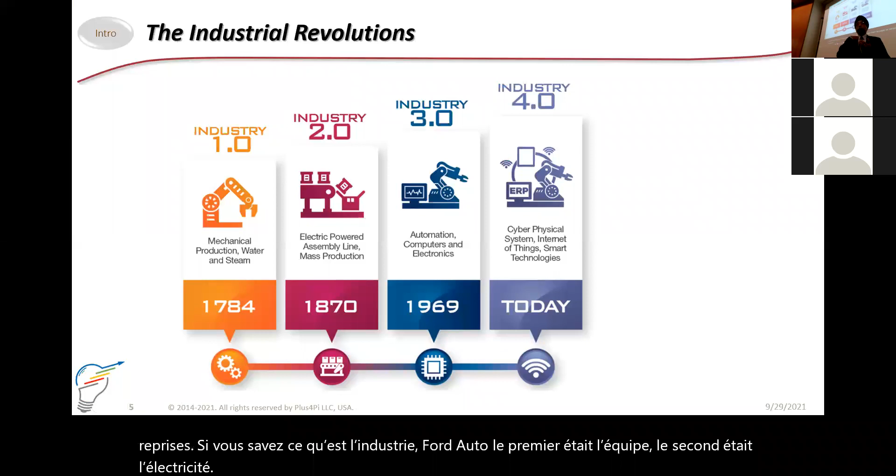I think you have seen either this type of chart or something similar many times if you know what is Industry 4.0. First one was steam, second one was electricity, third is computers, and the fourth is combination of physical reality and numerical and cyber systems. It's digital, physical together. In the second revolution, we became masters of the physical world. We learned how to deal with material. We learned how to process metal, non-metal, plastics, and everything to make products. In the third revolution, we became masters of the digital world, the data, the computers, processing, visualization, communication. Everything went from what used to be physical into the digital form.

Now, we are at a point where we want to become masters of digital and physical world. Yesterday, I gave an example of a driverless car. A driverless car is the most beautiful, simplest example to understand Industry 4.0. The computers in the car, the digital world in the car, fully understands the physical reality outside the car. It knows the traffic, it knows the road signs, it knows what is moving. The computer on the car can process that information in real time, very fast, and take physical action of driving the car, accelerating, slowing down, taking turns, avoiding accidents. The entire system is what differentiates Industry 4 from 3.

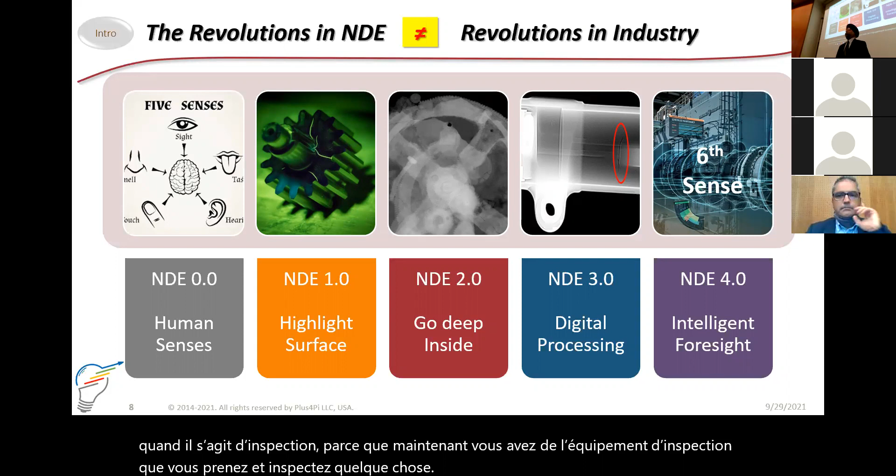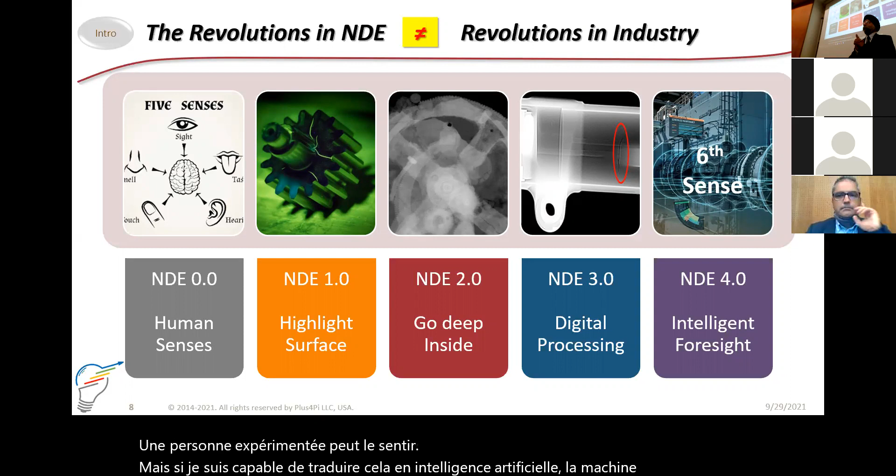That would be revolutionary when it comes to inspection, because now you have inspection equipment that you take and inspect something—it's not cracked yet, but it will crack in the next year or so. An experienced person can feel it, but if I'm able to translate that into artificial intelligence, the machine can also predict that. That would be NDE 4.0.

So that was my outline of what the fourth revolution in inspection is. We are now going in the inspection world from being able to see behind the surface, being able to handle it digitally, and now even able to see ahead in time—that it will crack in the next 6 months, and where will it crack. So we are adding a new dimension to our understanding, and that's why we call it a revolution.

Why do we want to do this? Let's talk about why.

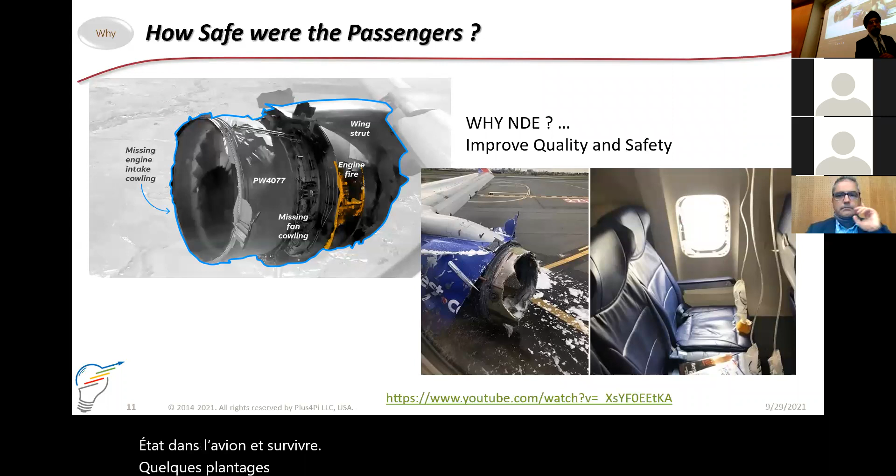Some more recent crashes happened—we talked about it briefly when we were waiting for the computer to come up. So we do inspections because they are critical to safety. That is why we do it.

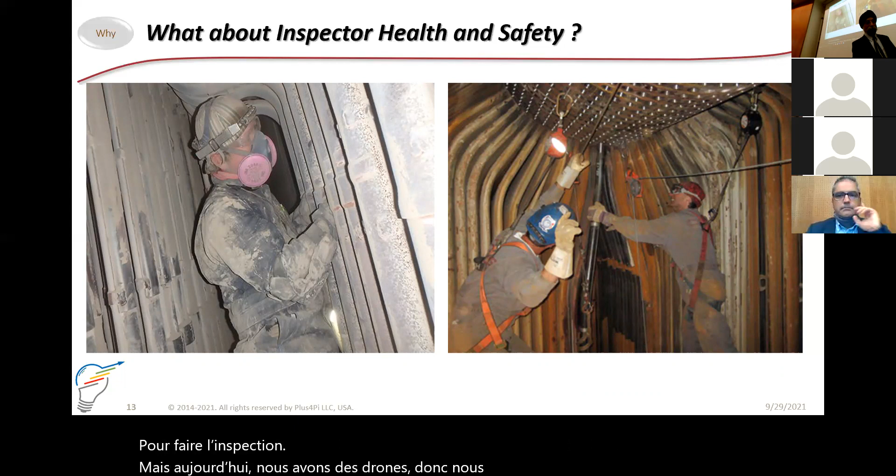There's another reason we want to have inspections done automatically. Here is a coal boiler where the inspector has to go into a very hazardous environment to do the inspection. But today we have drones. So we can actually save the inspector from having to go in by sending a drone that does the inspection. Okay? So there is value in automating the inspection system.

It assures safety for the passengers who are in the airplane. It assures safety for the users, travelers in the train, for the users living in the neighborhood of a nuclear plant. But it also helps us with safety of the inspectors.

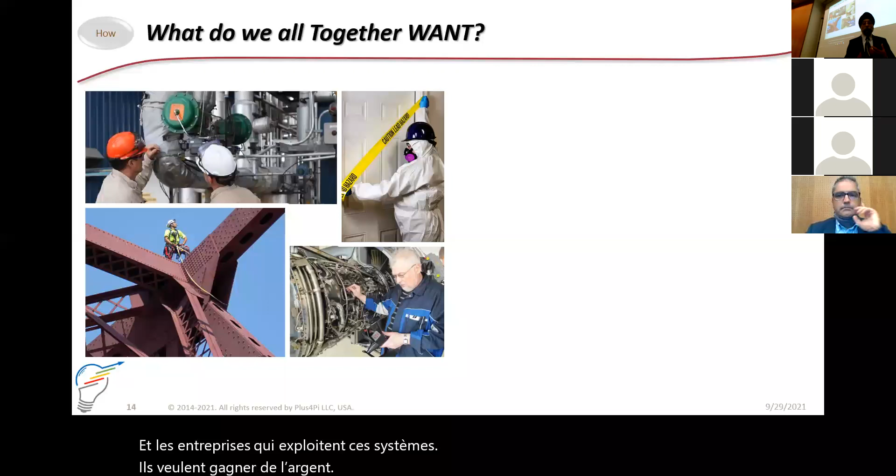All the people who are developing NDT equipment and companies that operate these systems, they want to make money. They want to be in business. They want to be profitable. So they look at how can we also pursue it so that it makes business sense. And one of the things that the fourth revolution does is it brings you both safety as well as economic value.

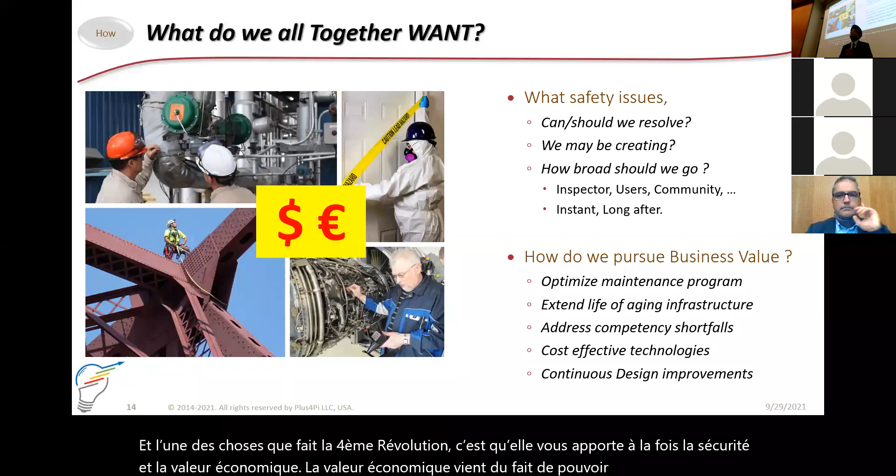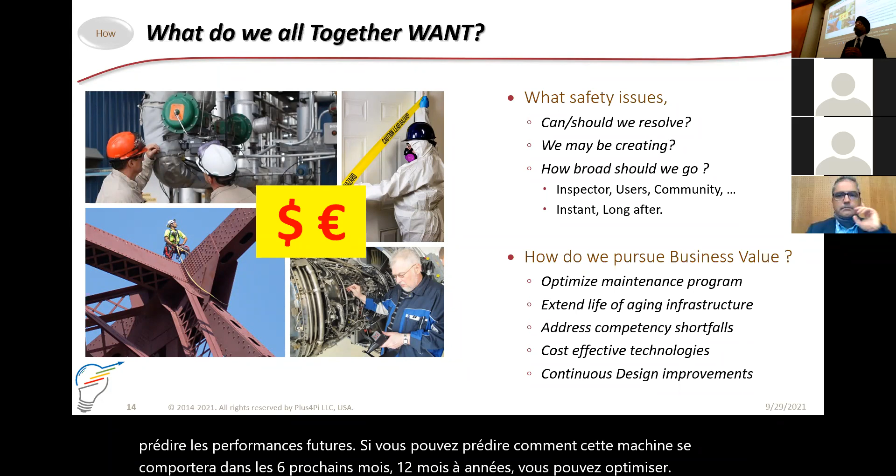The economic value comes from being able to inspect only when you need to inspect, to change parts only when you need to change, and to be able to predict the future performance. If you can predict how this machine will behave in the next 6 months, 12 months, 2 years, you can optimize its use. You can utilize it to the maximum. So that's why we pursue this revolution. It is actually taking you, it's a very interesting thing, from a planned maintenance to an adaptive maintenance.

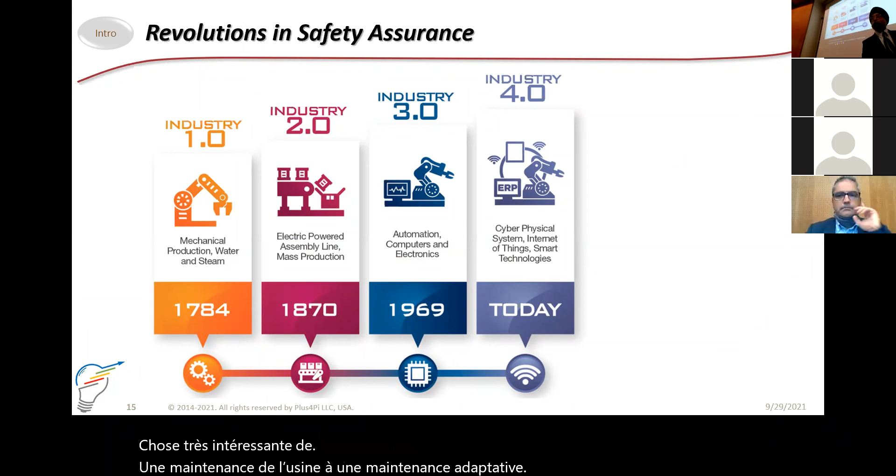In the history of safety, long ago, it was all intuitive. It's risky, don't sit under a tree about to break. Then engineers came up with the concept factor of safety around Industry 1.0. When it came to 2, we started looking at how do we prevent it? You know, the concept of safe life and fail safe so that you avoid failures unintended.

We had gone based on the computers to what we call predictive maintenance. Use the computer simulation to predict what to maintain when. But it was still just like Industry 3.0, mass production, mass application. What 4.0 can do for us is it can take us from predictive maintenance to what we call prescriptive maintenance. You know, just think about it.

When we work with doctors, doctors treat us as individuals. Well, there are vaccines where everybody has to participate. But otherwise, we all get our own prescription from the doctor. This is my health problem, which medicine will I take? It's for me. It's not for everybody. Right? Same way, each airplane, each train, each nuclear power plant, you can have a prescription for that particular asset as to how to assure its safety.

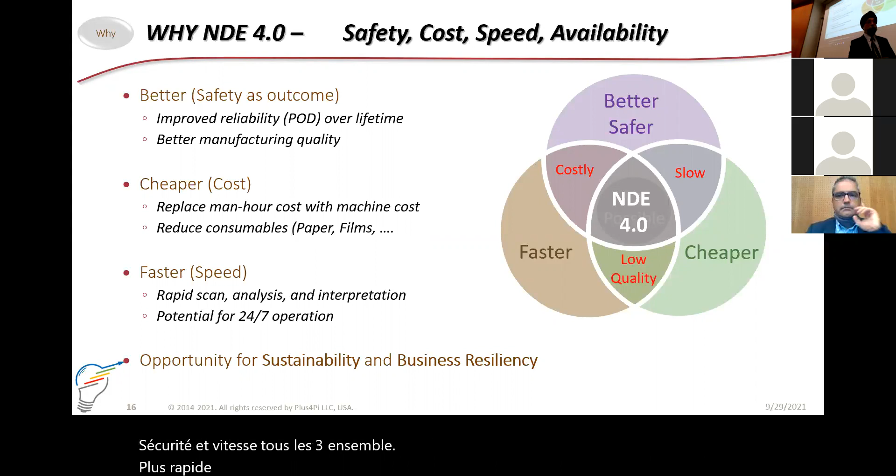I'll skip that piece for a moment. All right. And here, have you heard of the concept probability of detection? No, then I think I can skip that. Yes, you can speak about that. You want me to skip? Okay, they will understand.

All right. So, does it ever happen that you go to the kitchen and you open the drawer and you cannot see the pizza cutter? And then you call your mom and say, "Mom, where is the pizza cutter?" And mom says, "It's there in the drawer." And you still can't see it, and she comes and opens the drawer and the pizza cutter is over there. You just didn't see it. That's the concept of probability of detection. Something is there, but you're not able to see it.

Right? Can I see a black chalk here? No, because there is none. Can I see a red chalk here?

No. Can I see a pink one? Oh yeah, it was hidden here. There it is.

Whenever something is damaged, if there's a crack in a structure and you're using an instrument to find it, there's a probability that you can see it. Okay? And typically that curve looks like this. Very small cracks, you really can't find. They did not even exist. Even a crack size of 0, there's a small probability.

Human experience. All right, let's get to the what part of it. Okay. So within the inspection world, the what includes things like robotic inspections, all sorts of robots. Back to his question, can we recycle those robots? Probably not. And am I saving the human today? Yes. And can I repurpose them for something else later? Yes. Should I be designing these with materials that I can recycle? Yes.

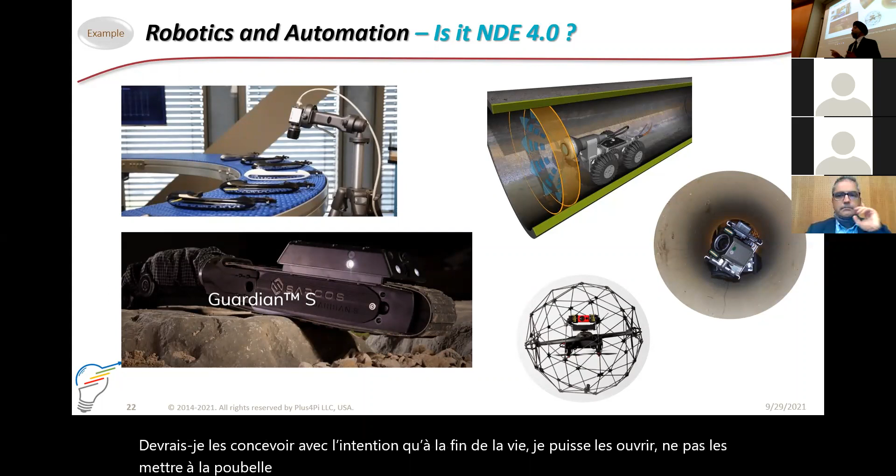Should I be designing these with an intent that at the end of the life, I can break it open, not put it in the junk, break it open, reuse whatever parts I can, recycle whatever parts I can. See, the circular economy really starts from the very first moment when you conceive the product. If you did not conceive it correctly, you may not be able to circle it back.

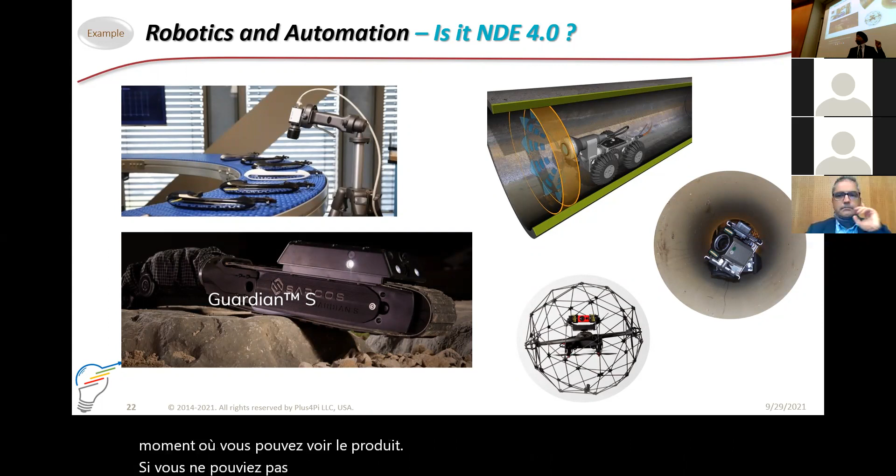Artificial intelligence is another big component of Industry 4.0 of NDE. Taking pictures and having AI recognize faults in that picture, identifying faults as to what could be corroded, what could be cracked, is an important what in it.

Augmented reality, that's another big one. An inspector can see the crack, wants to show it to the manager, is unable to show, but augmented reality can help that communication. It can help communicate what I see with my mentor, with my boss somewhere else, so that I can get input in terms of making the decision, making the judgment.

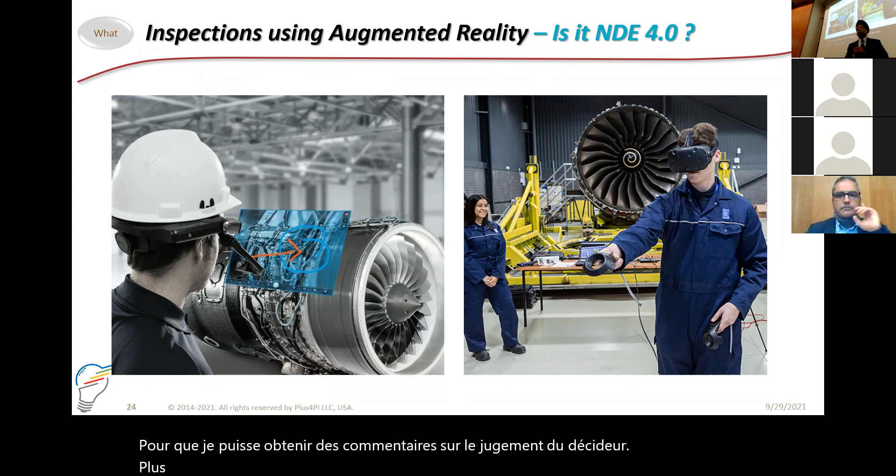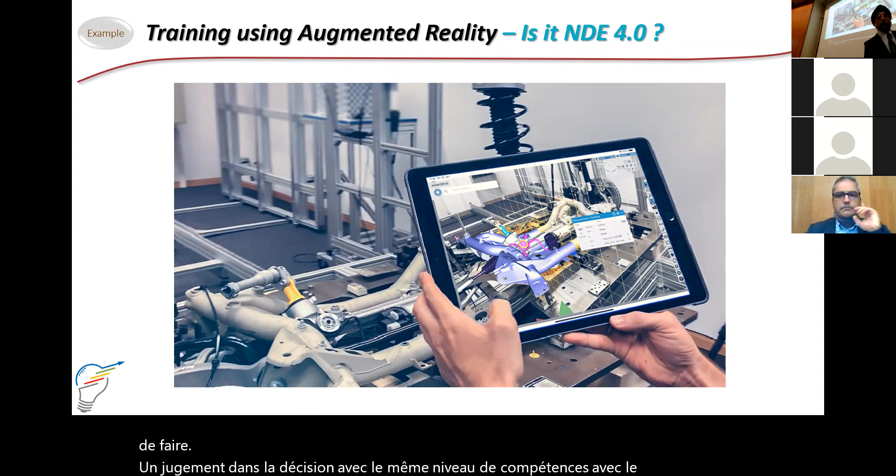Plus, another big component of augmented reality is around training of inspectors. Giving somebody an instruction to go inspect just in time, what, when, where, can be done through augmented reality, which means I don't need somebody with 20 years of experience. I can use augmented reality and artificial intelligence and give it to someone who may have only 5 years of experience and still be able to make a judgment, a decision with the same level of competency, with the same level of reliability, because I can use these technologies.

And drones, I don't know if you've seen this picture or not, but this is a very beautiful piece of device. It's a drone which has got a full cage around it. So it is completely protected. I can send it inside a tunnel. I can send it inside a boiler. It can bounce back here and there. It can hit the walls. It can still do the job and come back. I don't have to worry about it as much. I think I have a video if that works. So this is now inspecting inside the confined space.

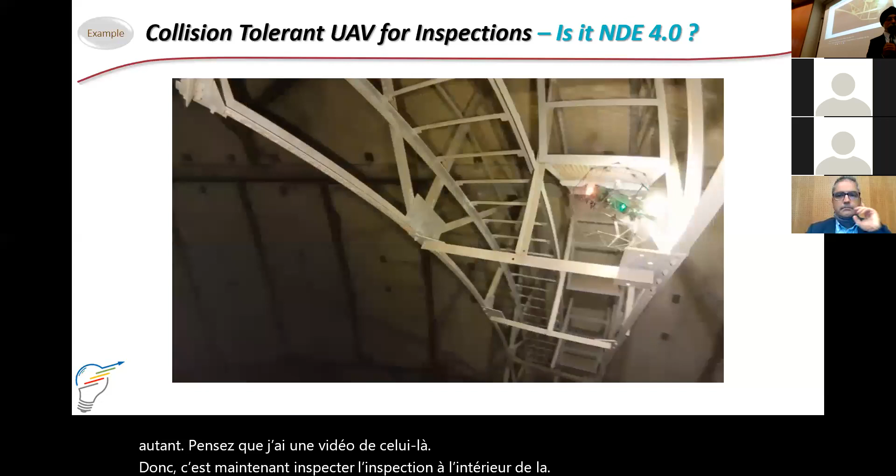Does anybody know how to turn this light off? It'll get better. You can see the screen better if we can turn those lights off. Serge, can we turn the light off? It'll be clearer. Sorry, it took me 40 minutes to realize that.

Okay. All right, here's an example. Here's another example of where one flying machine is inspecting another flying machine. Just imagine a drone inspecting an airplane. The younger brother checking out the bigger brother. So these are all part of NDE 4.0.

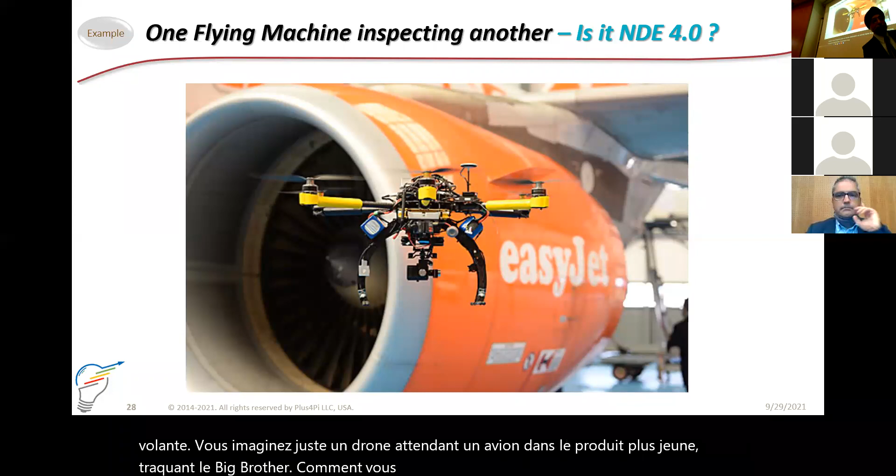I can go a lot into the detail of it. There is a debate, and Serge is a part of that. Six or ten of us around the world from different countries are really trying to put a box around what is NDE 4.0. We think about it, you can bring Industry 4.0 to NDE, or you can take NDE to Industry 4.0. But let's say you are using traditional inspection methods to inspect advanced manufacturing. That is applying inspections to Industry 4.0, to the smart factory.

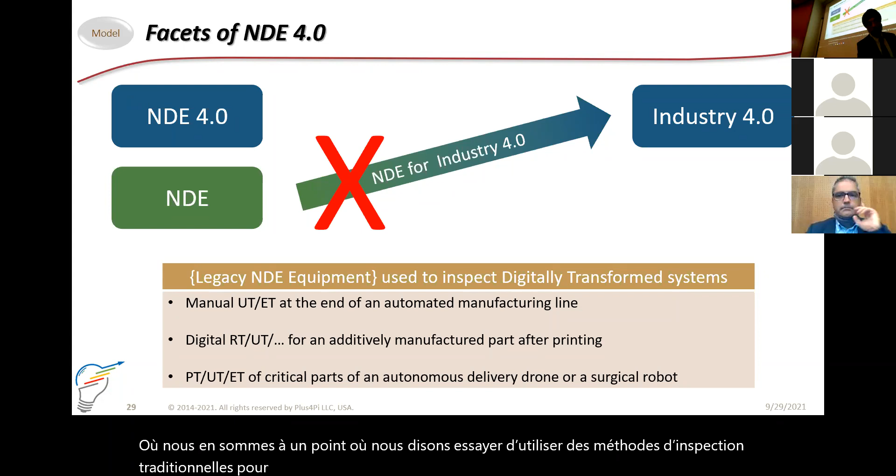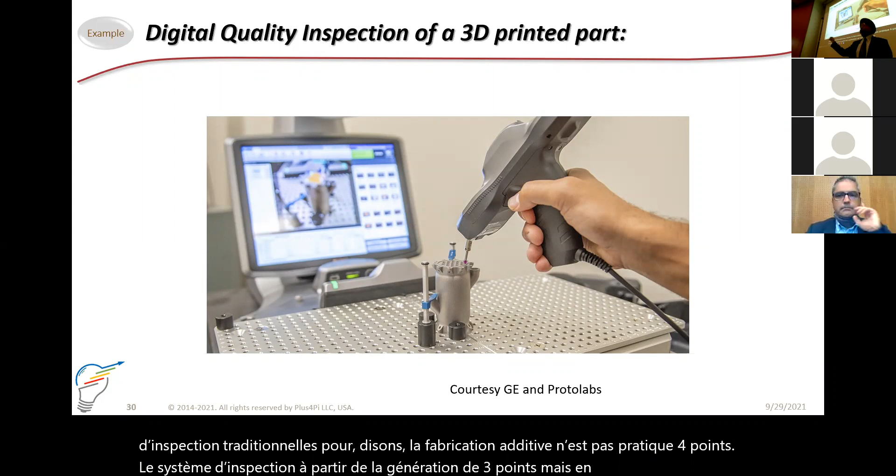And there's an example of that. This is actually not NDE 4.0. Okay? We are at a point where we say trying to use traditional inspection methods for, let's say, additive manufacturing is not NDE 4.0. Here is the inspection system from the 3.0 generation, but being used on a fully automated, 3D printed part. This does not qualify to be NDE 4.0.

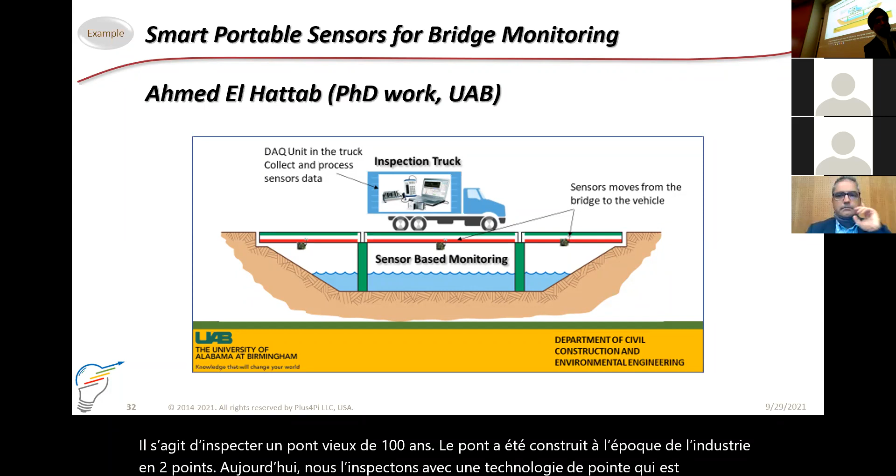But if you bring digital technologies from Industry 4.0 into NDE, it does qualify to be NDE 4.0. The example is this. There's a truck with remote sensors in it, which is inspecting a bridge that is 100 years old. The bridge was built during the Industry 2.0 era. Today, we are inspecting it with advanced technologies. That is NDE 4.0. But the real game is when you do both together.

When you have a true digital transformation, that's like the purest form of NDE 4.0. An example could be a smart factory, and it has a fully automated inspection in it. Now back to your point, is the human out? Human is out of the loop, but it is on the loop, not in the loop, but on the loop, which means the human knows, the human is watching the loop go physical, digital, physical, digital. Human is outside the loop. That is the true digital transformation. That's the purest form of NDE 4.0.

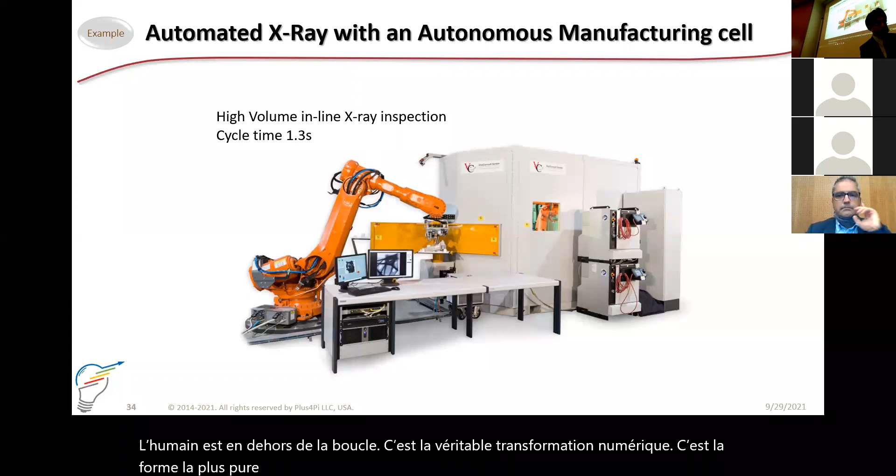Many of us have started defining it so that others can follow it. We have given two definitions. There's a short definition and there's a long definition. The short definition is a mutual convergence of NDE and industry technologies for social, safety, economic, and reliability. So, the three things that we talked about: faster, cheaper, better. It's like that: safer, cheaper, and dependable, right? So if you bring digital technology and physical inspection methods together for a purpose, it's NDE 4.0.

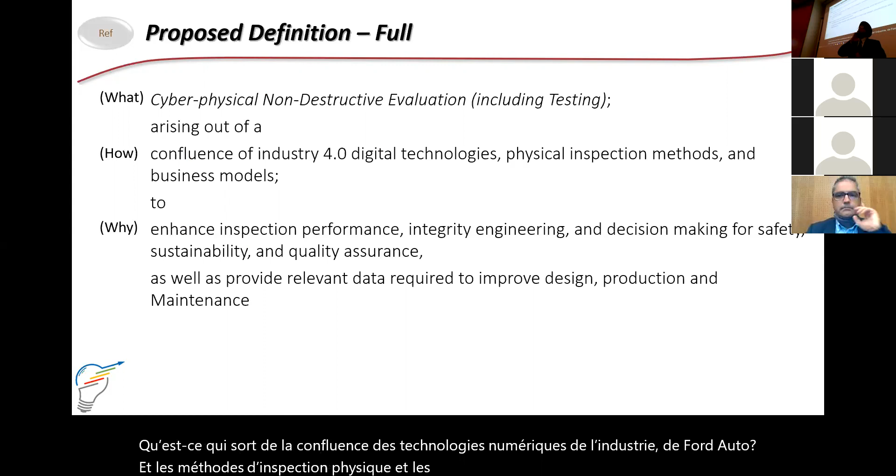The full definition, which some people are uncomfortable with, as of now, the proposed definition is, it's the cyber-physical NDE, which comes out of the confluence of Industry 4.0 digital technologies and the physical inspection methods and business models. Business models mean how you take it to a company, how you generate revenue, how you handle it, in addition to the technology piece of it. Two, for a purpose, we have to define that. Enhance inspection performance, integrity, decision-making for safety, sustainability. And the final piece is how you take the data back to the design.

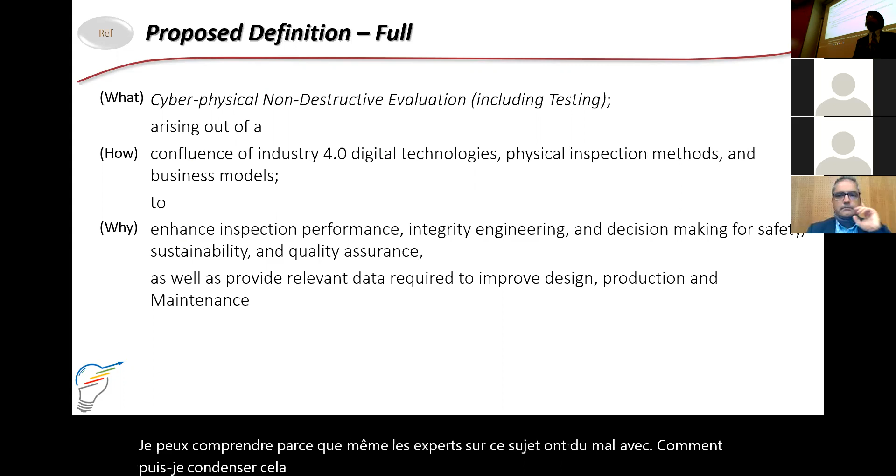So there's a lot in here. If you're overwhelmed, I can understand, because even experts on this topic struggle with how do I condense this without losing the meaning. There is so much in here. We want to define why, what, and how, all three in one definition. So I always say, okay, here is a real definition which gives you a complete explanation, but then this is the shorter one, if you like to use it. Either one of them would work. So that's the what piece of it.

The kind of scenario it can create for us going forward is like a smart depot, whether you think of it as an airplane or a train depot, where the depot starts preparing for an aircraft to come in even before the aircraft comes in. The augmented reality walks the inspector through: you put on your goggles, it walks you through, go there, touch this, inspect this, report this.

The scheduling system manages the flow of spare parts and the repair activities. The workflow has become smarter. It adapts if somebody called in sick and is not able to be there, if there is still a human in the loop. Each component has a digital twin and a digital tag and is digitally tracking its history and usage. Robots could be performing the inspections. Robots and humans could be collaborating to perform the inspections. Artificial intelligence does the analysis for you.

Something had to be changed on the spot. You use a 3D printer to create a spare part quickly and replace it. You don't have to wait, order it from Airbus, and it comes in 3 months. No, you print your spare part, install it, and let the airplane go back to service. So that's what a smart maintenance depot could look like in the near future.

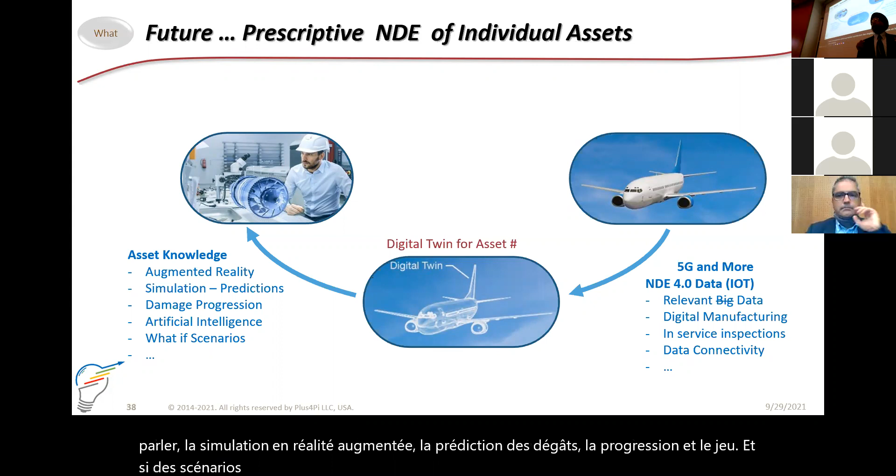I use the same technologies we just talked about, augmented reality, simulation, predicting the damage progression, and play what-if scenarios just like a driverless car does, so that I can prescribe how to handle this particular asset. You remember I mentioned prescriptive maintenance as against predictive or preventive maintenance. I can now prescribe for this particular asset how to handle it. And I'm not talking about maintenance. I'm talking about handling, because handling is more than maintenance. It's also about how you use it.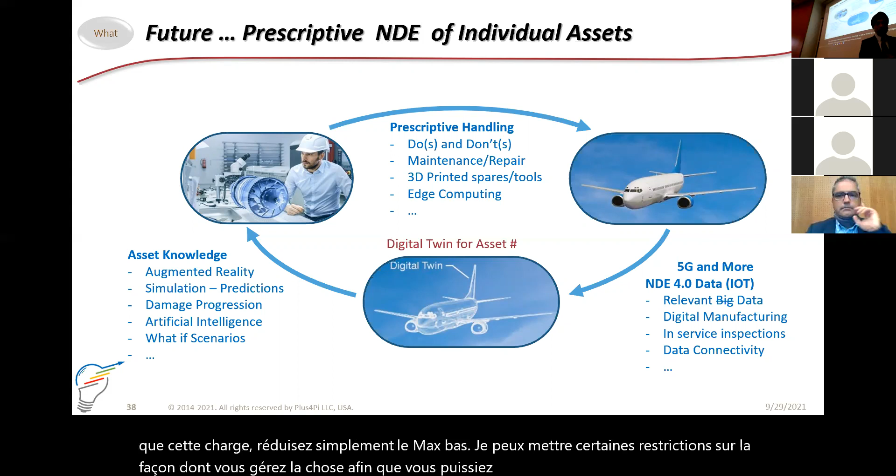I can put restrictions. I can put limitations. Don't fly more than 11 hours at a stretch. Don't carry more than this load. Just reduce the max load. I can put certain restrictions on how you handle it so that you can avoid failure. Human is still in the loop.

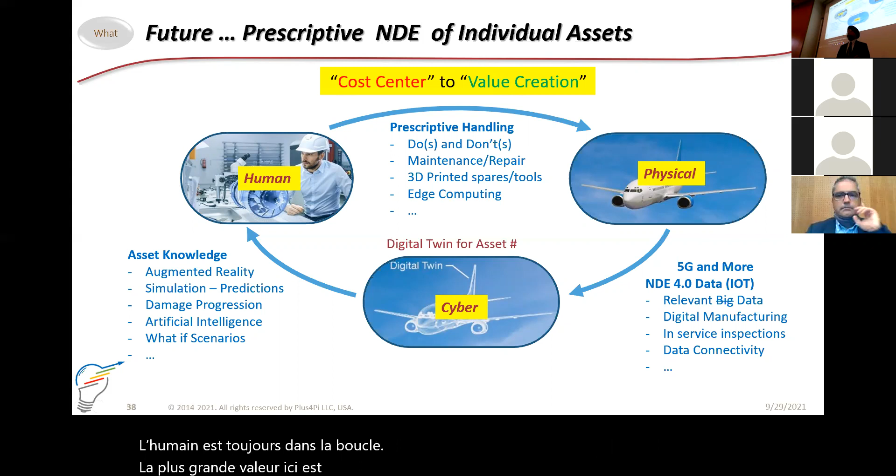The biggest value here is that NDT is always viewed as a cost center. Managers don't want it. They think inspection is a waste of time and money. The business operators do not like inspection. But the way we are looking at it now is the inspection data has value. So even if I take the airplane or train out of service for a few hours to do the inspection, the data I generate creates value. So I can go from inspection being a cost center to inspection being value creation.

That's a big mindset shift. And Johannes and I work very hard on this particular messaging, that it's regenerating NDE, rebuilding the respect for the profession, which is very important. But this requires that we look at it as an ecosystem. The real value will come when the data can be shared across multiple entities.

So it's another piece: what is the data, where is it coming from, and who is sharing it? Because the asset OEM is like Airbus. They built it. The owner operator is Air France that's operating it. The inspector could be me, who's inspecting the airplane every day. And the NDE OEM could be Serge, who built this new equipment that does the inspection. So we are all important players.

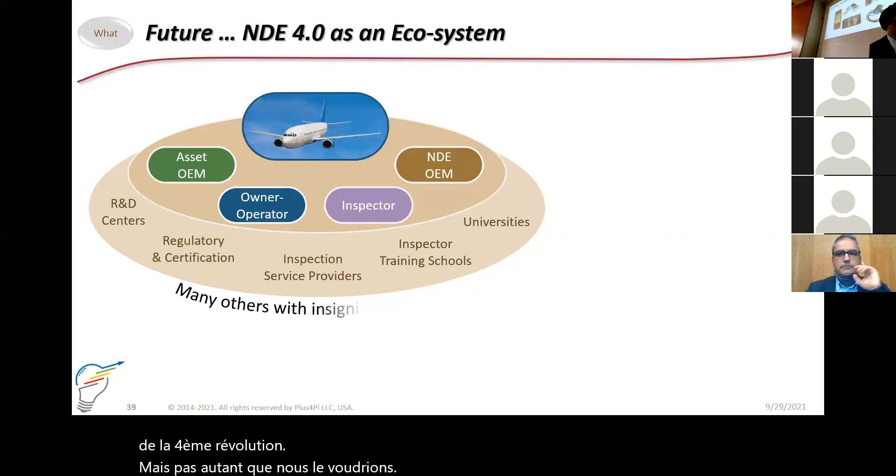Sorry, Ripi. No, I understand, it's due to the technical problem. I apologize. Okay, no problem.

So the how piece of it is around innovation, how you go from idea. If you've understood the why and what, it's actually good at this stage, because how is very important for organizations to make it happen. So maybe 5 years from now when you become managers in places and you actually have to do it, then you can learn how to do it. Or I can share a paper with you, a PDF, so we can get there. But the important thing over here is you look at it as an ecosystem, everybody together, work with data as an environment and work together to make it happen.

It's a journey. It will not happen overnight. It takes a few years. You have to deal with a lot of uncertainty and ambiguity. But in total, it makes sense. I always used to say, doing things together is better. But now I say, with NDE 4.0, together is the only way to do it.

Because otherwise, it's like the moment data becomes environment, it's like air we breathe. It's like water we live on. It's like the infrastructure. You can't be on your own. You have to be a part of a system to work at this together.

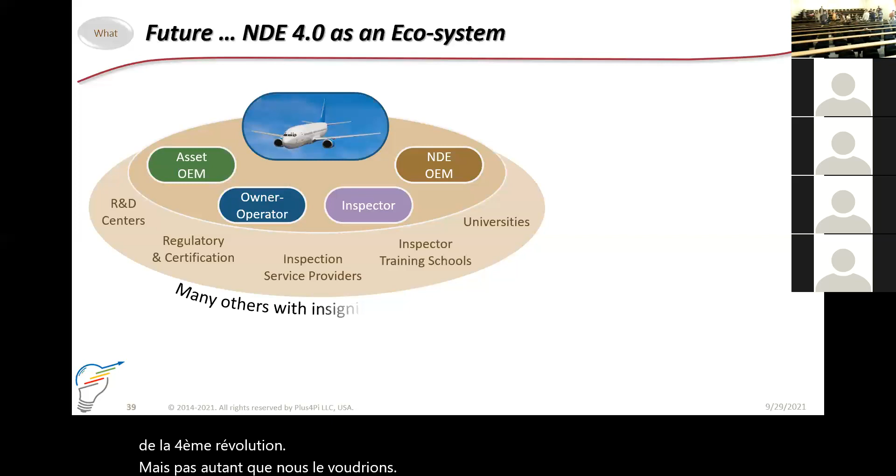I'm sorry, I had to go a little slow because people were not engaged. But I think the content was perfect. That was perfect, no problem. I think it was better to skip the last section rather than breeze through it.